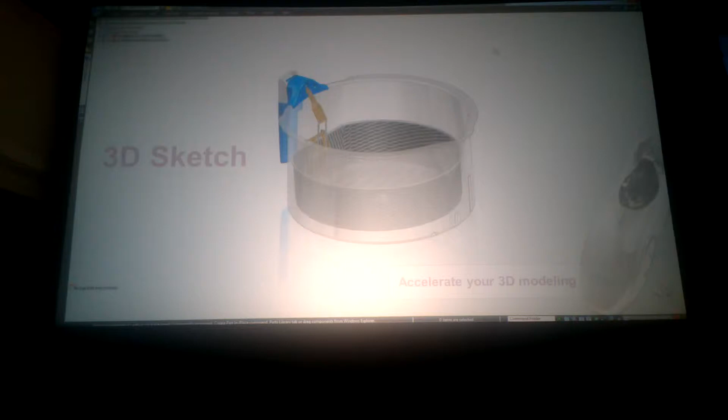Let's drop a helicopter and use something else. This is from one of our French customers, SEB Group. If you've heard of the brands Moulinex, Krups and Tefal, that's all down to those guys. So this is a Tefal deep fryer.

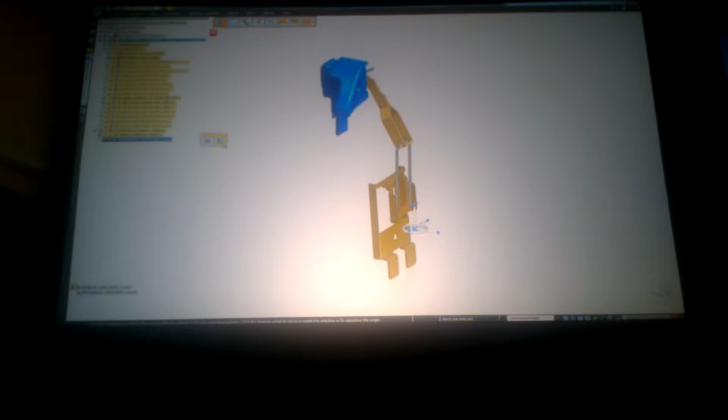And the component we're going to design here, this wire lift guide, really lends itself to this new ST7 functionality of 3D Sketch. So it's another in-context design. We'll model this top down, so we'll go in and start this creation. To get access to these 3D Sketch tools, there's a new tab in the top toolbar, and you've got a whole bunch of sketching tools, all related and specific for 3D sketches.

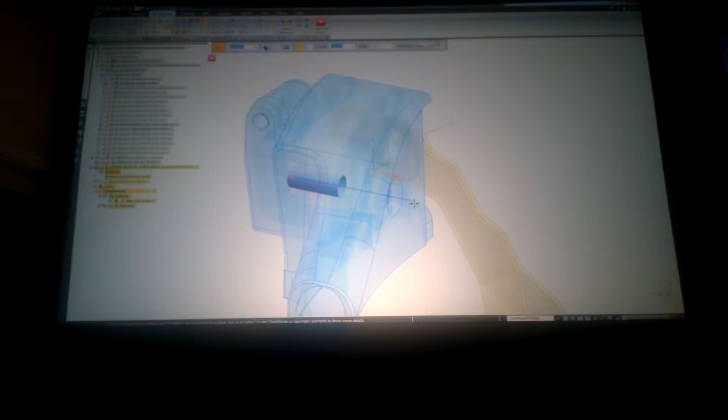Let's start doing some work here. We'll snap it onto the central cylinder and pull it out from there. You're seeing nice sketch feedback as you're relating into, in this case, concentric to the cylinder, so it's very clear what's going on. You'll also see the on-screen dimensions for the sketches. You saw this in 2D sketches, and this is exactly the same in 3D sketches too, so across the board.

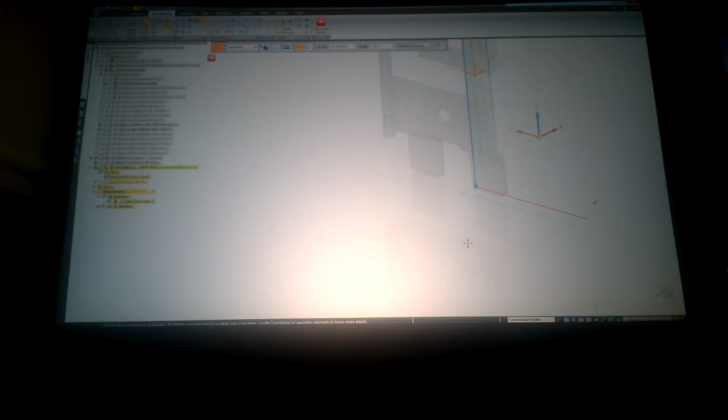You'll also notice there, Mark just dragged down this other triad. It's the 3D sketch triad, and it helps you control which direction you're sketching. Obviously you have full flexibility because now we're in 3D, so we can lock down into those different axes. You'll see the X, Y and Z, some will disappear as we toggle through, so you're just toggling through on your keyboard which direction you want.

When it comes to sketching something like an arc, it wouldn't make sense to lock onto an axis, so we can lock onto a plane instead. You'll see a green plane here come up, and again you can toggle that and lock through where you need it to be.

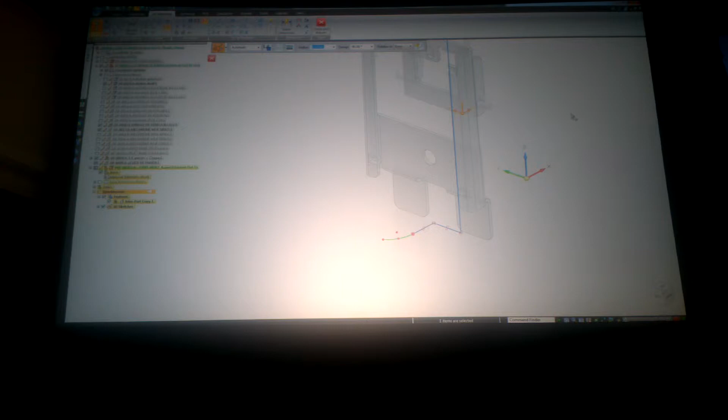Alright, so we're just going to model one side of this. It's a symmetrical part, so we'll do one as a solid and then mirror it across onto the other side, so we'll just finish this off. Another point to make is the sketch relationships you're familiar with in 2D, they of course work in 3D as well, so if you need to line any of the sketch items up, you can do.

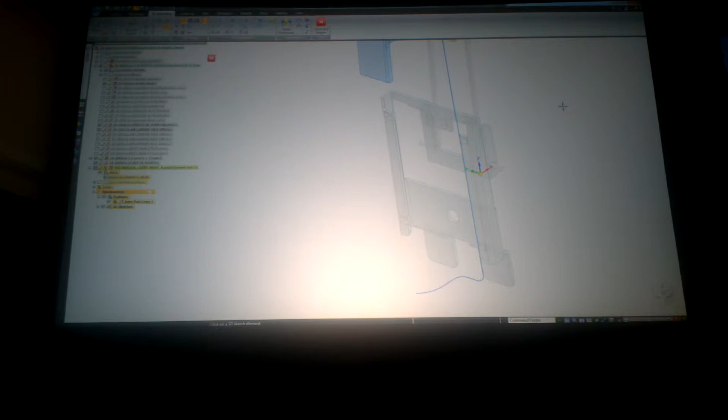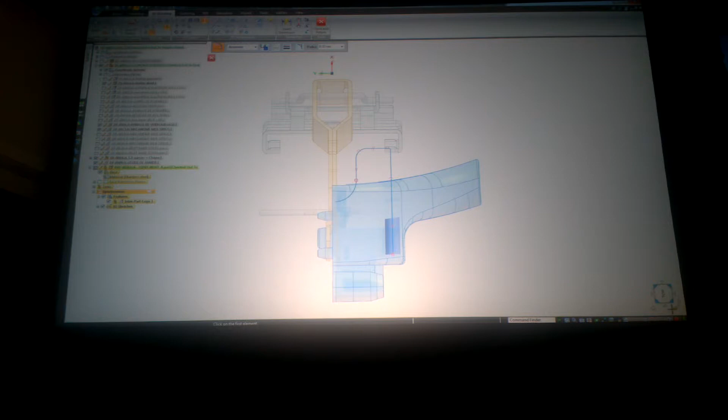So something down the bottom right here that Mark just used is this new quick view cube to move your view around your model so you can quickly navigate what you're looking at. It's very intuitive to use, doesn't really need much explanation, but it is something that's very obvious in the ST7 user interface. So you've got top, right, front - you just click on the faces and it'll rotate the model around so it's very clear to see what's going on.

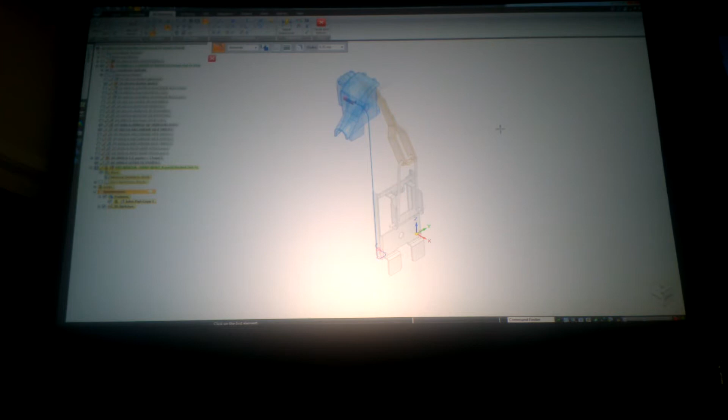If you click the corners, you can get round into different isometric views of the model. And also you'll notice there's these little arrows, they'll go around in 90-degree increments, so you can rotate the model around and very clearly manipulate what you're doing. Great for 3D sketching, because of course we can be modelling in all different directions, so it's very clear for us which direction we're going in. But it is always there in any environment, apart from 2D of course.

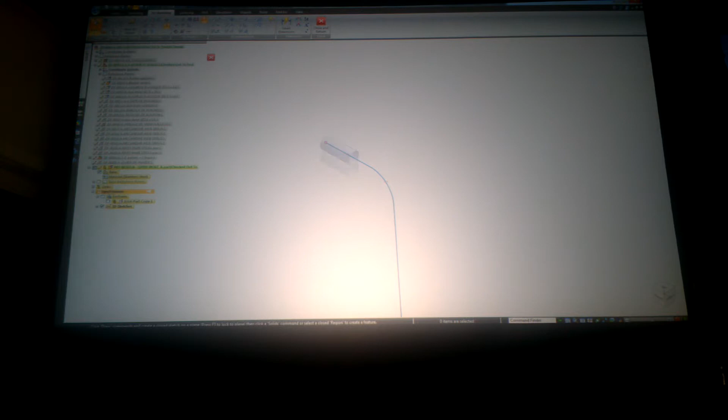Alright, so let's continue. That little cylinder, why do we have that there? Well, it's the inside face of the little handle at the top, so we needed to take a measurement of that. We're going to sweep a profile around this 3D sketch path, so use the 3D measure tool to take a measurement, and then we'll pop a plane on the side here to do our sketching.

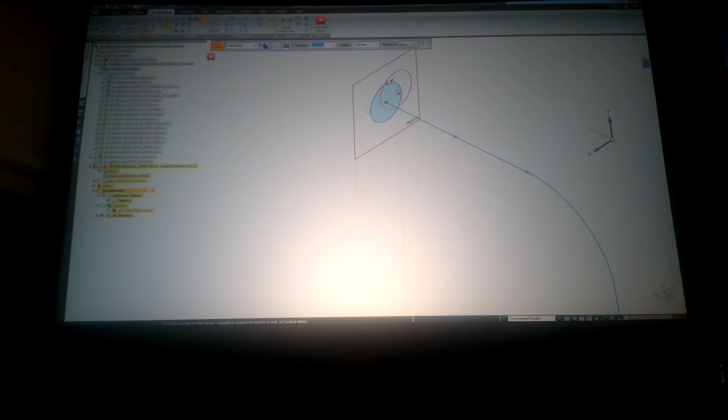Also notice in ST7 the names of the planes coming up, so it's very clear to see what you're working on. And here we will sketch our circle at the right diameter. Again, we can use the on-screen dimensions that you saw previously, which makes it nice and quick. And we will sweep that profile along the 3D sketch path.

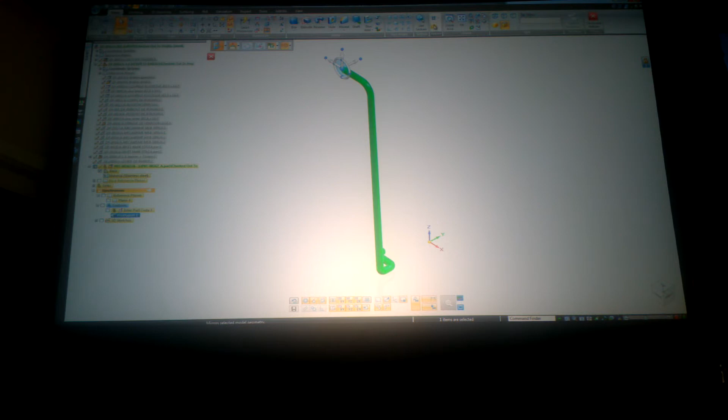So synchronous, of course, comes into play here if we want to make any geometry changes. We'll mirror across to the other side first, but that underlying 3D sketch that we had - if we needed to make edits post-creation, we don't need to think about going back to that 3D sketch. We can just use the synchronous edits if we wish.

Maybe if we wanted to grab that lift guide and move it into the clamp, I think there's a rear clamp that we need to snap it up to. We could use the steering wheel.

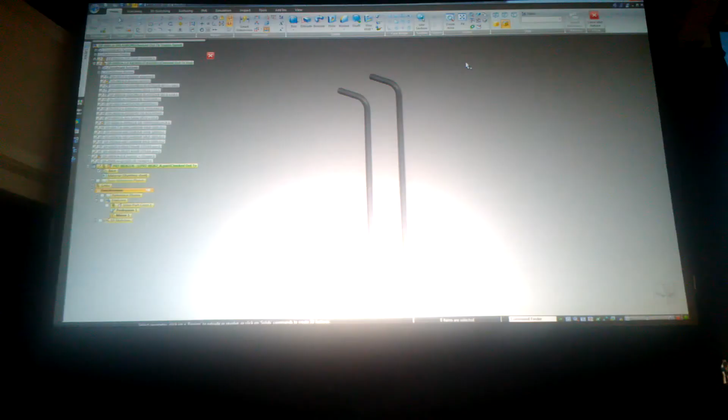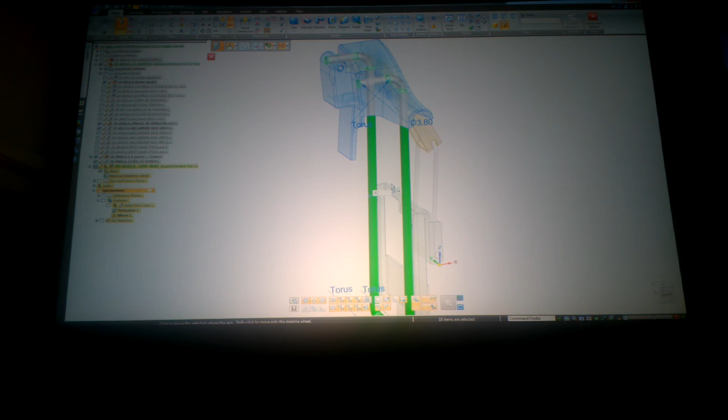So you can just fence select all of those faces, or the ones that we want to use. And here, remember, for those who don't use synchronous, that steering wheel - the reason we call it the steering wheel is it's your main control. So if you wanted to adjust this and snap it into that bracket on the back, we could make a movement of the steering wheel half of the diameter of that profile of the sweep. Remember, you can type in equations in that steering wheel to allow it to move into the right position, and then we can move the geometry. In this case, that means we're going to get it right onto that bracket at the back.

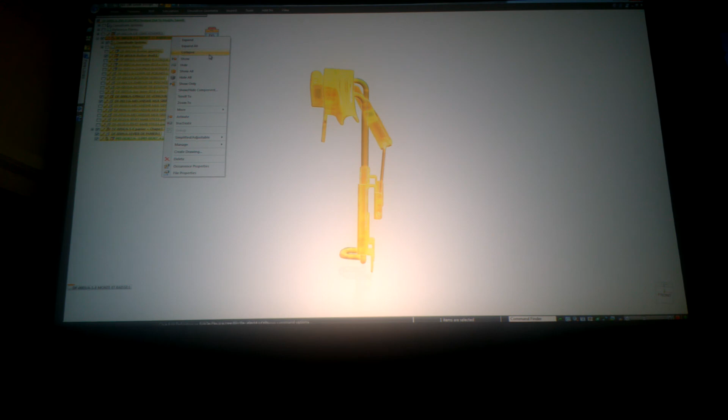Alright, so let's take a look at how this whole thing is working. Could you maybe take a look at the mechanism? Maybe grab a bit of the mechanism and see how it's working, and maybe grab the handle and see what it looks like.

We do that. Yeah. Woo! That was nice. Okay, looking cool. Alright, I think that was pretty cool. Yeah, nice. Yeah. Well done.